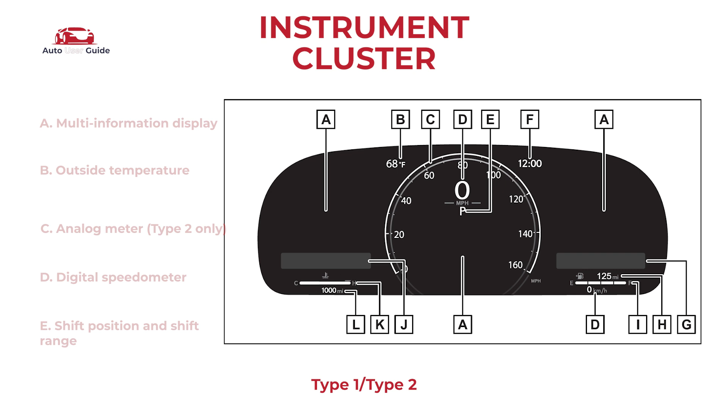Type 3 of the cluster in the Toyota Crown.

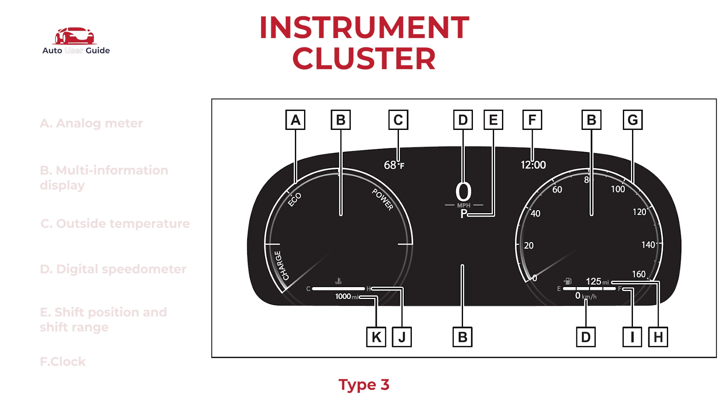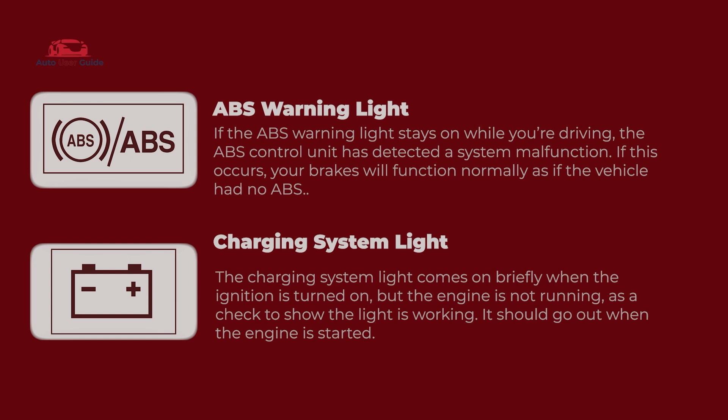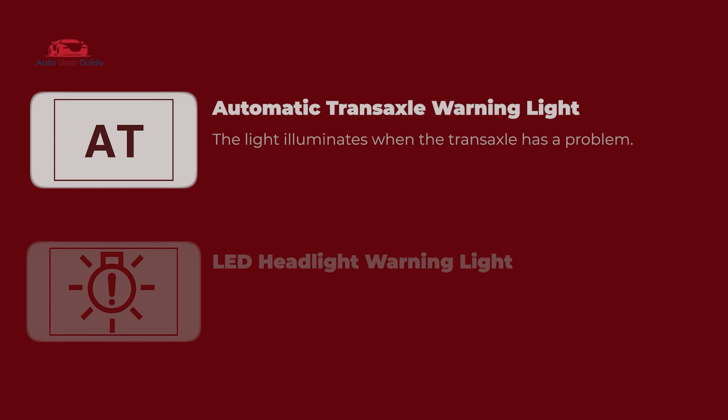Cluster indicators: master warning light, brake system warning light, ABS warning light, charging system light, engine oil warning light, check engine light, motor-driven power steering, and engine coolant temperature.

Automatic transaxle warning light, LED headlight warning light, forward collision alert, high beam on light, lamps on reminder, low fuel warning light, check fuel cap warning light, seat belt warning light for the front seat, low washer fluid level warning light, and door ajar warning light.

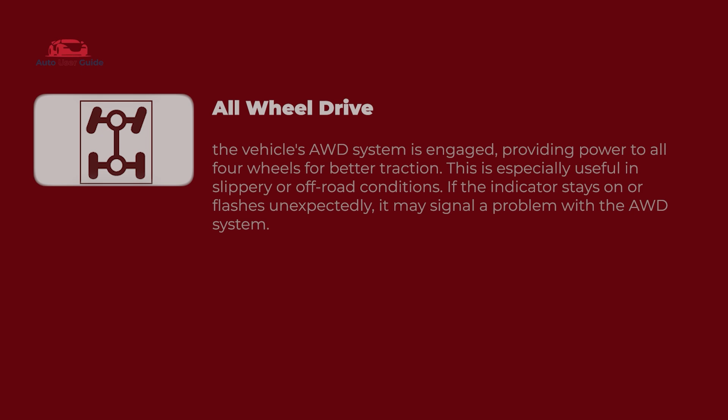All-wheel drive lock, tire pressure monitoring system, key warning light red, wrench indicator light, smart city brake support light, StabiliTrak off light, traction control system, shift position indication, turn signal, security indicator, and cruise main indication.

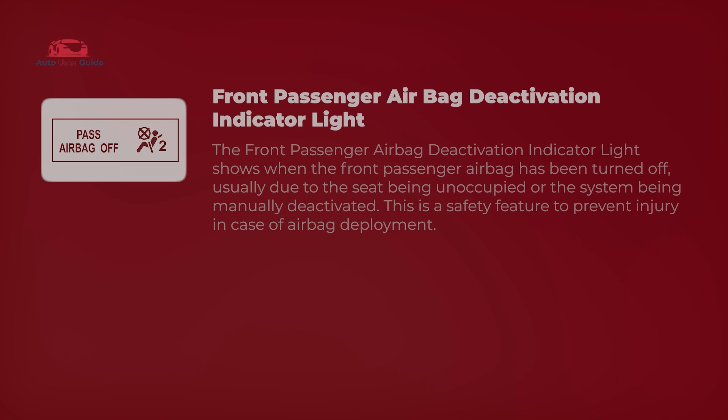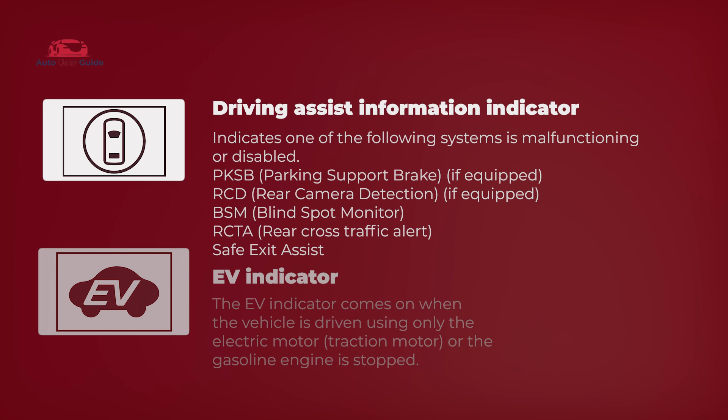Driver mode control light, select mode indicator, front passenger airbag deactivation indicator, key indicator light green, the hybrid system overheat warning light, inappropriate pedal operation warning light, LDA indicator, PDA indicator, driving assist information indicator, and EV indicator.

Gauges and meters: tachometer and temperature gauge.

Instrument cluster display.

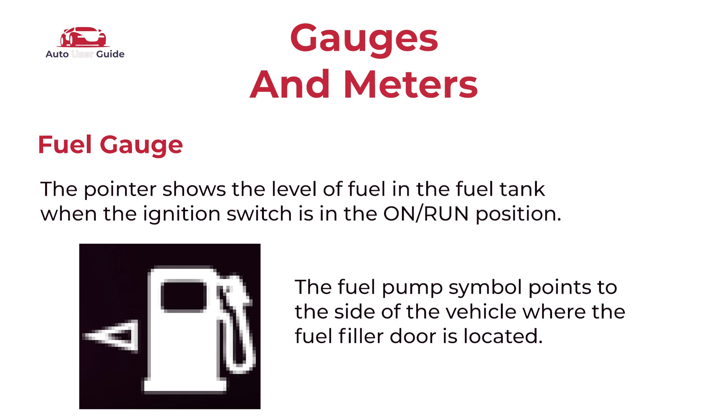Safety precautions: know your symbols and give them immediate attention. Don't ignore flashing symbols, and stop driving for red warning lights. Check your manual for unknown symbols, and keep up with regular maintenance.

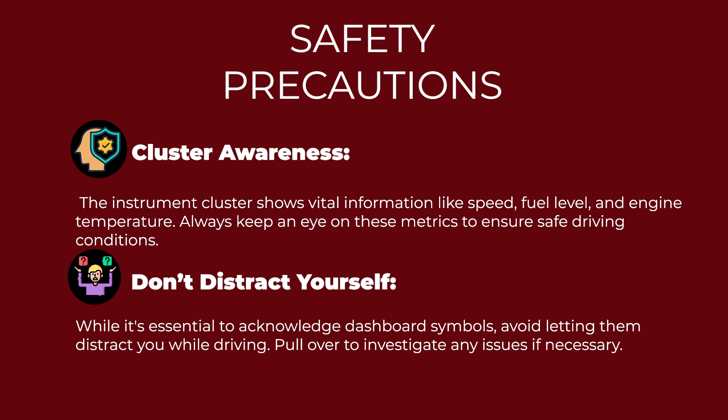Cluster awareness: don't distract yourself. For low visibility of symbols, use an OBD2 scanner for diagnostics.

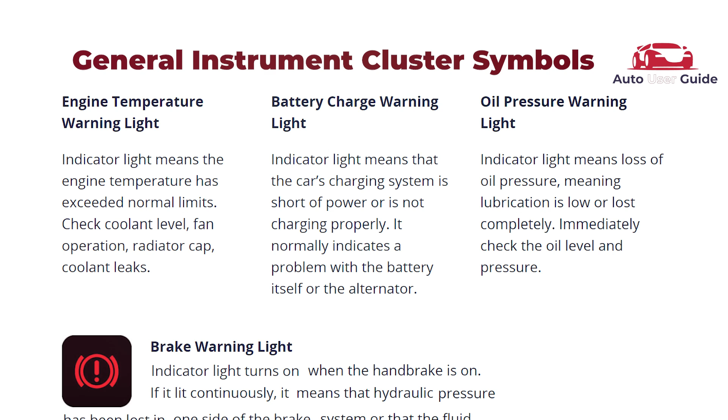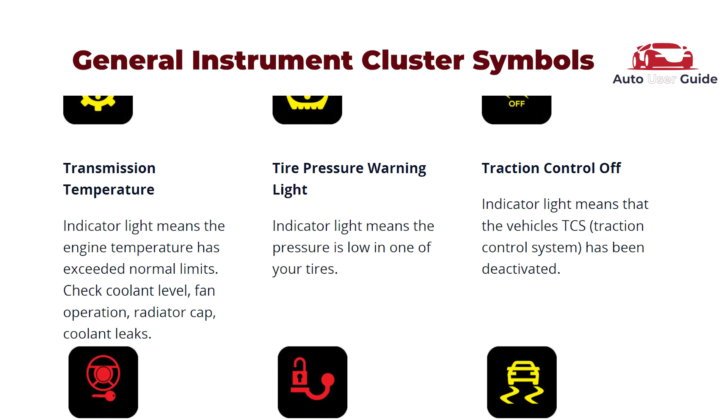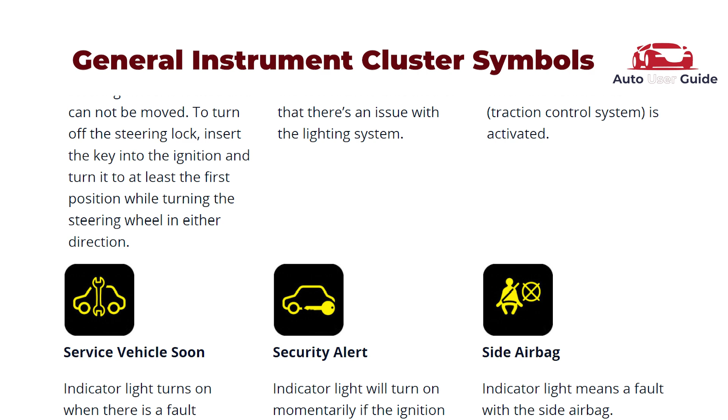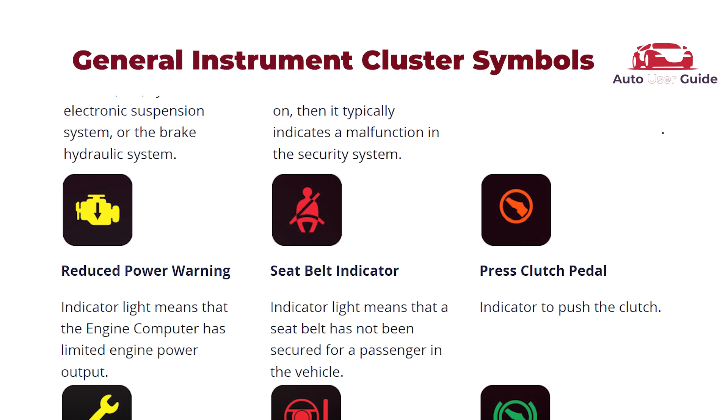General instrument cluster symbols, or general dashboard warning symbols, are designed to help you understand the most common indicators found in all vehicles. Whether you're driving a sedan, SUV, or truck, these symbols play a crucial role in keeping you informed about your vehicle's condition and safety. Knowing what these symbols mean and how to respond can help prevent breakdowns, maintain your car's performance, and ensure your safety on the road. From the check engine light to the oil pressure and battery indicators, each symbol serves as an alert to help you take action before a small issue becomes a bigger problem. Understanding these warnings can give you peace of mind, keeping you aware of potential issues and allowing you to address them promptly. Now let's dive into the most common symbols you may encounter and what they mean for your vehicle.

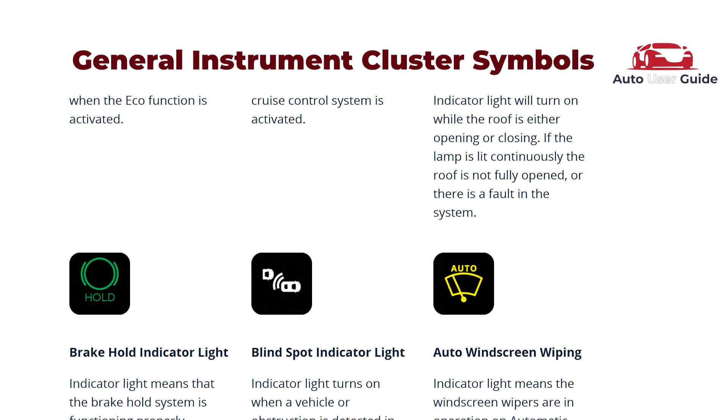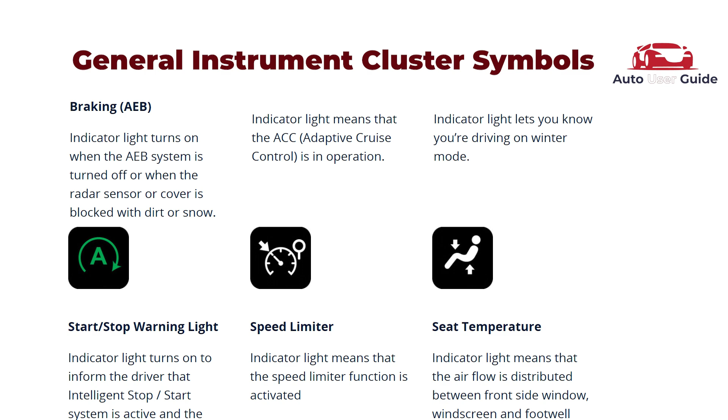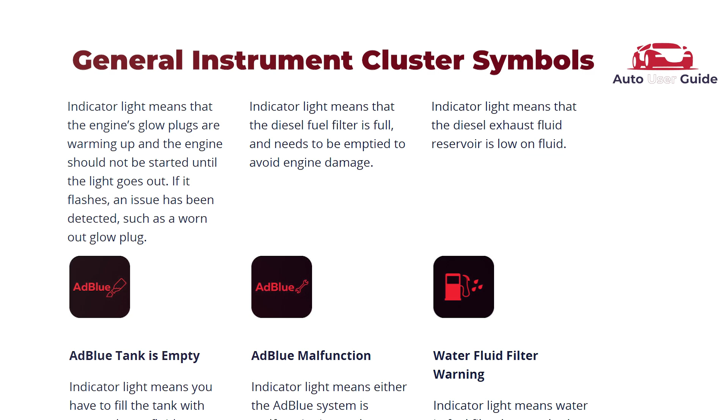Now that we've covered some of the essential symbols, keep in mind that while many dashboard indicators are universal, some may differ depending on the make and model of your vehicle. It's always a good idea to consult your car's manual for specific meanings and recommendations.